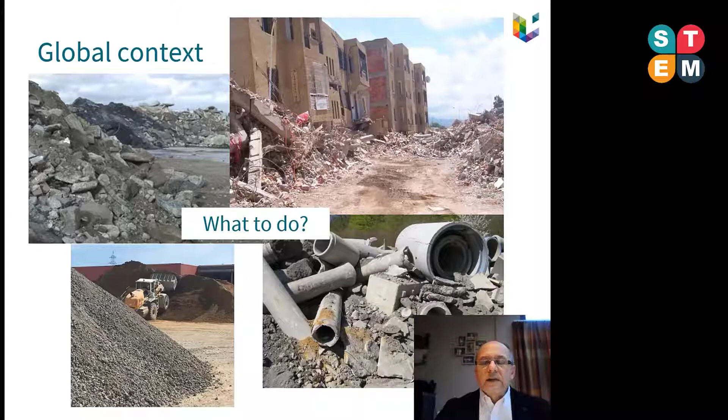First of all, we have to consider that we are living in a very, very limited world. If we consider the last COP in Glasgow, we can be sure that this limitation has to be considered in terms of energy, in terms of materials available specifically for the building and construction industry, but we are limited also in terms of space.

Where can we build? In some countries, in some cities, it's very difficult to find a place to build. We also have to consider the limitation of the environment's and nature's capacity to be resilient, meaning to be able to absorb the waste products we are producing. From this consideration, we have to change our behavior. That's one of the most important messages from the COP in Glasgow.

Regarding the construction industry, we have to consider the deposit and the market. Is there a good connection, a good correlation between the deposit and the market? That's what I would like to show you.

Firstly, we need to consider the capacity of construction and demolition waste to be recycled, once again in the construction industry. If we consider the scheme presented on the slide, we have to go from a linear economy to a circular economy, a well-known concept specifically applied to the construction industry, which has to be considered an objective for this industry.

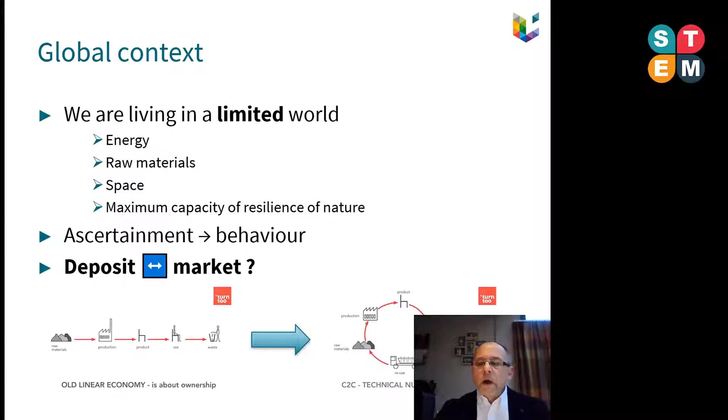Waste has to become a secondary raw material. If we consider the quantity of waste produced all over the world, about 4 billion tons a year are produced. That means from 80 to 126 tons per second produced worldwide.

The quantity of waste generated by human activities is enormous - 10 billion kilos of waste daily produced. In the construction industry, this corresponds to about 200 million tons in 2015.

The construction industry is responsible for more or less 40% of the CO2 and more or less 40% of the total quantity of waste produced, if we add recycled aggregates and the quantity of earth produced as waste.

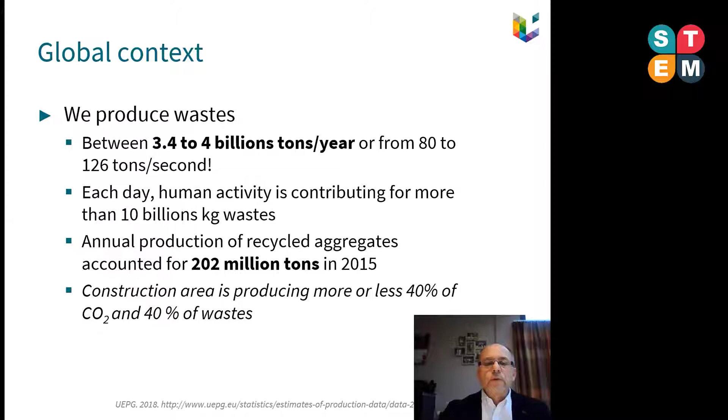This is enormous. On the other side, we need a lot of materials. As an example, the production of cement is about 4 billion tons a year, 56% coming from and consumed in China. For the concrete industry, it corresponds to about 10 billion tons a year that we need to build bridges, roads, houses, buildings, dams, etc.

In terms of production and consumption of cement per inhabitant in 2018, it corresponded to more than 1,700 kilograms in China. In the European Union, it corresponds to an average value of 300 kilograms. In the USA, it's a little less than this, and in Belgium, for example, it's 550 kilograms per inhabitant.

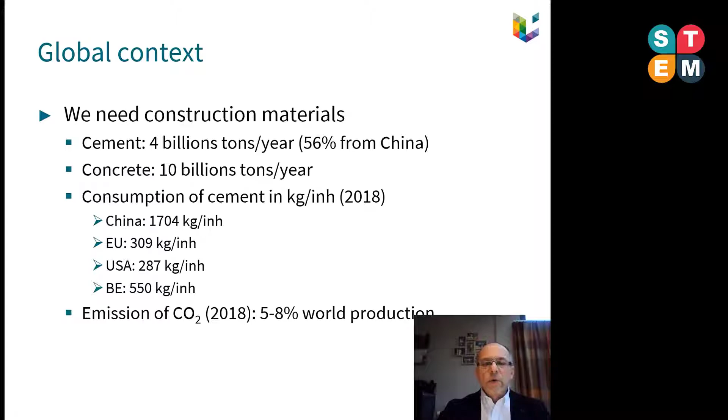This typical material, cement, corresponds to a production of CO2 representing between 5 and 8% of world production. So we have to do something to reduce this production of waste. But we need construction material, we need aggregates.

This is the production of aggregates in billions of tons in the European Union and associated countries in Europe. We annually produce about 3 billion tons of aggregates, which is also a material becoming more and more limited in terms of access to exploitation.

This production at the level of the European Union is coming from a lot of small quarries and pits operated by more than 15,000 companies and local companies, because this is a very particular way of production as it is localized, and transportation has a big impact on the cost of the material. So we are also limited in terms of transportation.

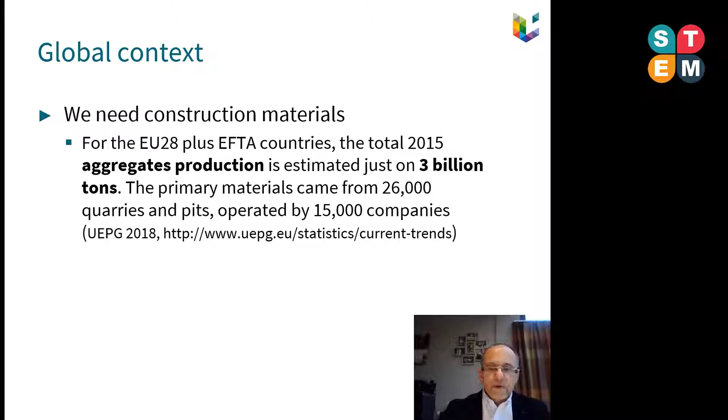This is a view of the production and consumption of aggregates in different European countries. Most of the production comes from crushed rocks and sand and gravel, and only a very small quantity of materials comes from recycled mobile or recycled fixed plant areas.

That means there is a big challenge to develop and increase the share of recycled material used in the construction industry.

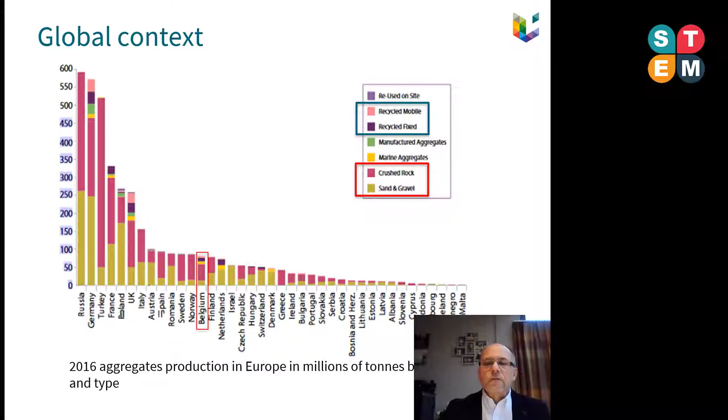This objective is oriented according to the 3R theory, which proposes a reduction, a reuse, and a recycling of materials. Recycling is the third step. Of course, it's better to reduce and reuse before recycling. But now we are at the level of recycling.

What is it possible to do with this construction and demolition waste, which is already used mainly in sub-base and base material in road construction, but which is a less noble application of this material? The objective is to introduce and increase the use of this material in a more noble industry, meaning concrete for prefabricated systems or structural elements.

The objective of the European Union in 2020 is that 70% of the construction and demolition waste should be valorized. Valorized means reused or recycled in the construction industry, or in other industries if possible. That means our main objective is to reduce the use of classical and natural raw materials.

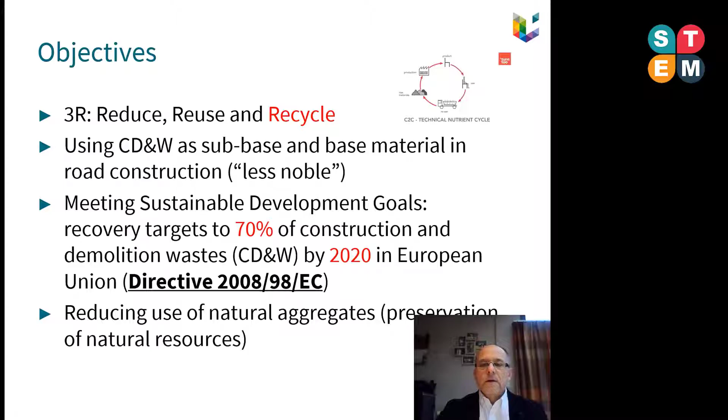For that, it's important to be able to characterize and to point out the difference between natural raw material and recycled raw materials.

The process for obtaining recycled construction demolition waste is a seven-step process where we have the reception, the storage of the material, the first processing for separating most of the material, then a mechanical grinder that leads to the first main step, which is the crushing, usually by means of an impact or a jaw crusher.

After that, there is a classification of the material, specifically to obtain and extract ferrous and possibly non-ferrous material from the mineral one, which is constituted mainly of concrete, bricks, ceramics, etc.

A seventh important step is the separation, which is a manual separation of material to avoid rubber, wood, and plastic material, which could be considered contaminating material for the development and production of aggregates.

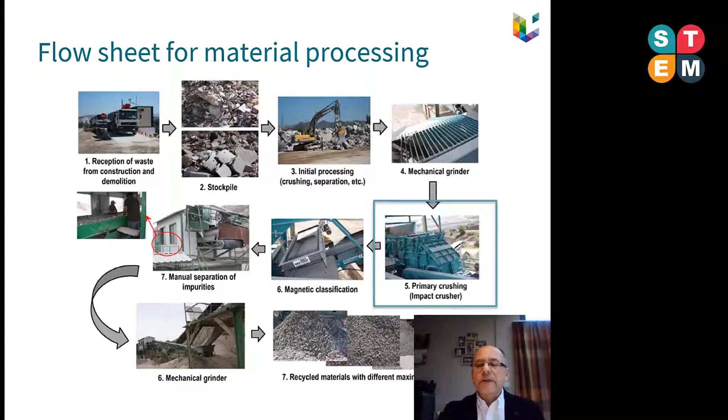This crushing may be obtained by mainly two types of crusher, like a jaw crusher, which allows us to produce very fine fractions but can induce a significant wear process, meaning we will have to continuously replace the jaws in the system.

The second type of crusher is the impact crusher, which can be used to treat bulky waste like concrete slabs, but it doesn't allow production of very fine particles and generally requires a secondary crushing.

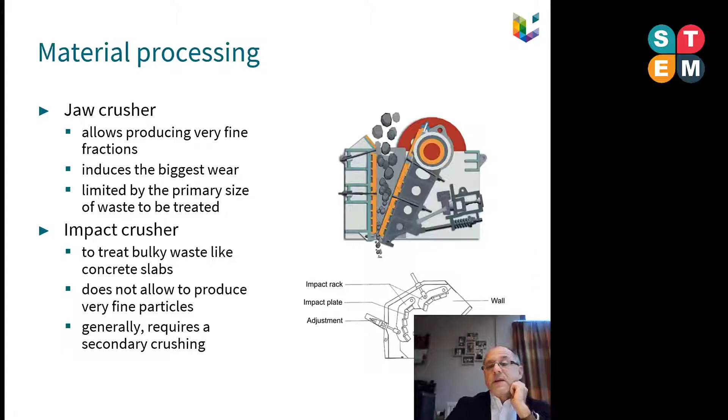How important is it to select the proper crusher? This is important from the point of view of the characteristics of the material, and specifically the flakiness.

Here you can see that we produced experimental mixes, changing one reference mix of reference concrete. We changed the type of cement, from CEM1 to CEM3, sandstone versus limestone, and we also changed the cement content and the water-to-cement ratio. We wanted to investigate the effect of crushing on the characteristics of the material.

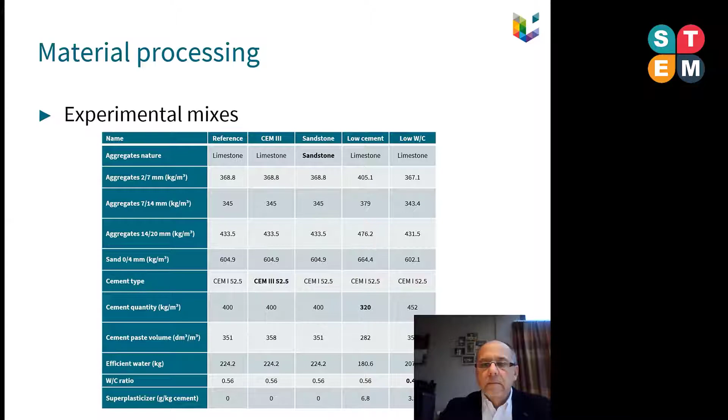We can see here the flakiness index with regard to the granular fraction, and we observe that flakiness decreases with increasing granular fraction. This means the jaw crusher is also producing flakier aggregates, even though there is no influence of the concrete composition. So the granular fraction has a big impact on the characteristics of the material obtained, specifically with fine particles.

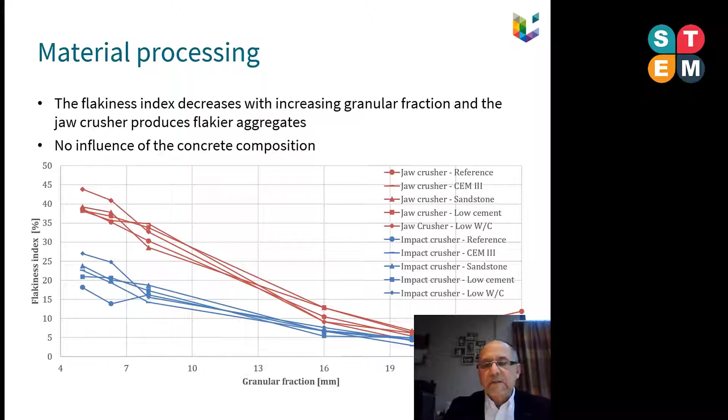We also observe that the water absorption, corresponding to the quantity of residual cement paste adhering to the former aggregates, is higher for a lower granular fraction. This means that sand particles contain a larger quantity of residual cementitious material, which is detrimental to the characteristics of the material to be recycled.

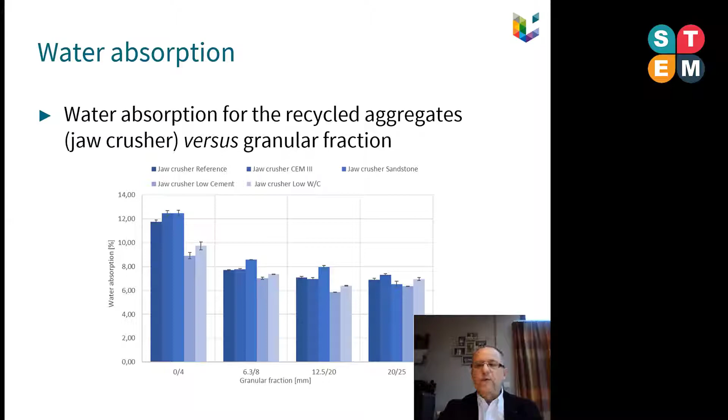That's why we set up different PhD theses to study the characteristics of these fine materials. You can find the references on the slide. These theses were oriented toward the recycling of crushed concrete aggregates, the influence of residual gypsum adhering to fine aggregate particles, and also the reuse of bricks. I would like to focus only on the second and third topics today.

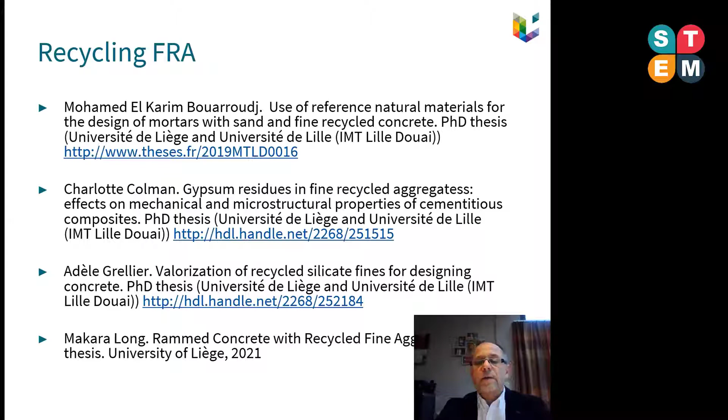So first of all, what is the effect of gypsum residues on fine recycled aggregates? Recycled aggregates, specifically the finer fraction—that is, the 0 to 4 millimeter sandy particles—are very often not valorized because they correspond to a high quantity of residual gypsum.

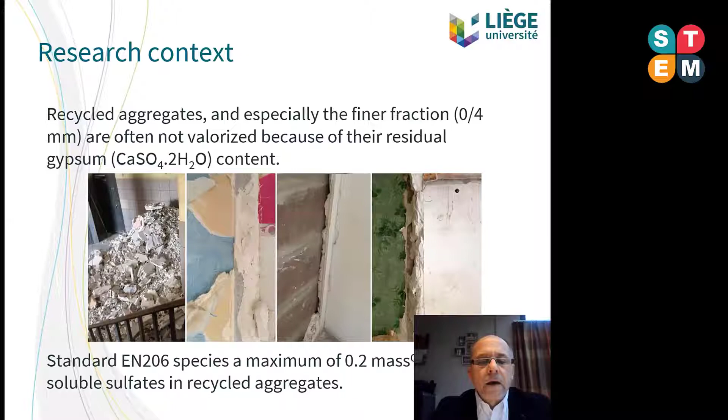Gypsum comes from the plaster used in buildings, and is characterized by the chemical content CaSO4·2H2O, which can be detrimental to the reuse and valorization of this type of material. The EN standard devoted to concrete specifies a maximum of 0.2% by mass of sulfate in recycled aggregates.

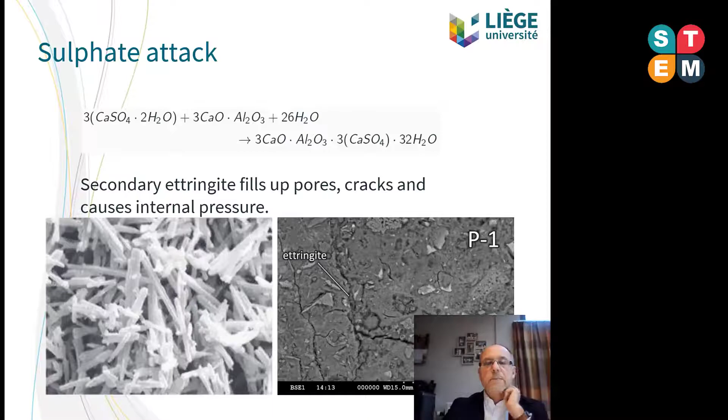Why is it so important? It's because the chemical reaction of this gypsum with the calcium aluminate you can find in the cement, in presence of water, can produce big crystals in the forms of ettringite. This secondary ettringite, produced by this chemical reaction, produces expansion cracks, and by internal pressure can induce very big deterioration of the concrete. That's why there is a big and strong limitation of the use of this material.

The consequences at the structural level are this type of degradation with a lot of cracks, a crocodile skin pattern of cracks, induced by this internal pressure, specifically in structures which are in contact with water.

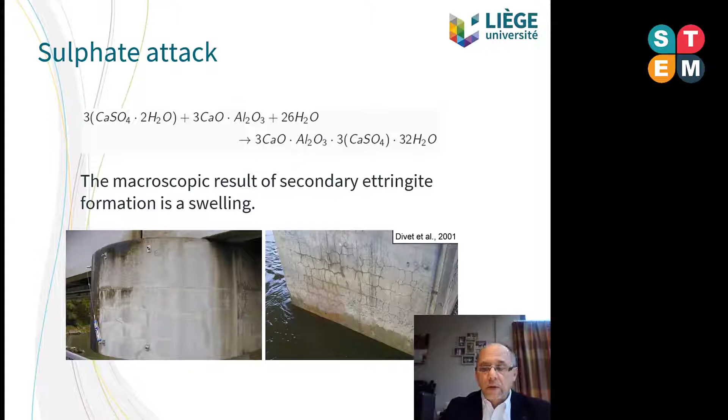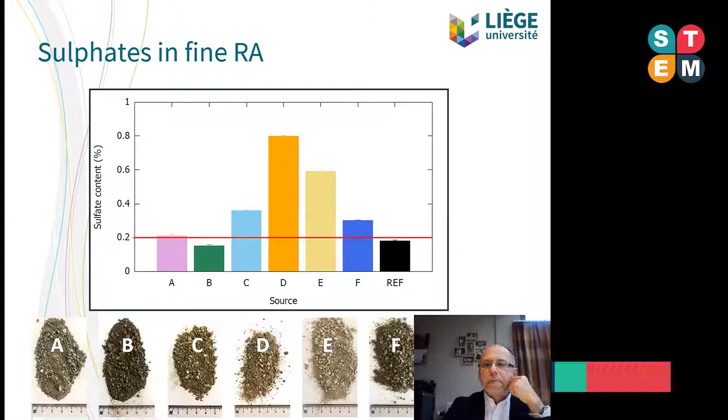We made an investigation on different recycling plants, and we took some samples to analyze the quantity of sulfate contents. Remember that the limit is 0.2% of recycled aggregates. In some situations we were above this value, in others under this limitation, depending on the type of recycling plant and the type of material coming to these plants. Of course, concrete coming from roads construction doesn't contain a lot of sulfates, while concrete coming from houses is contaminated with larger quantities of this material.

We tried to study, by recomposing materials in the lab, to clearly define the effect of the presence of sulfate with the fine recycled aggregates used to produce mortar. We measured the length change over time for these different types of material. The observation was that you needed a high level content, here the reference with more than 3%, to obtain and observe a real length change, corresponding to internal pressure and cracking of the material.

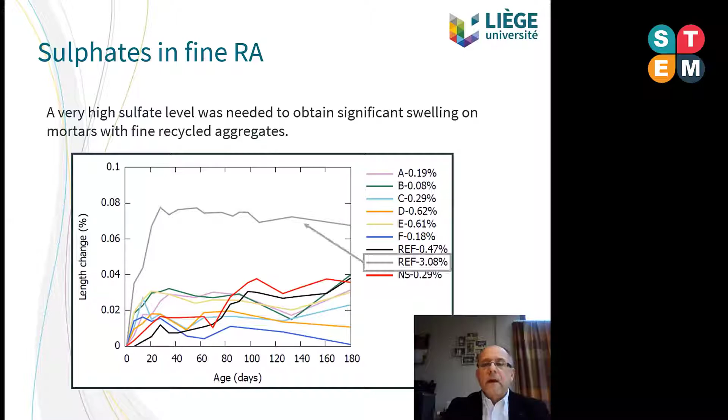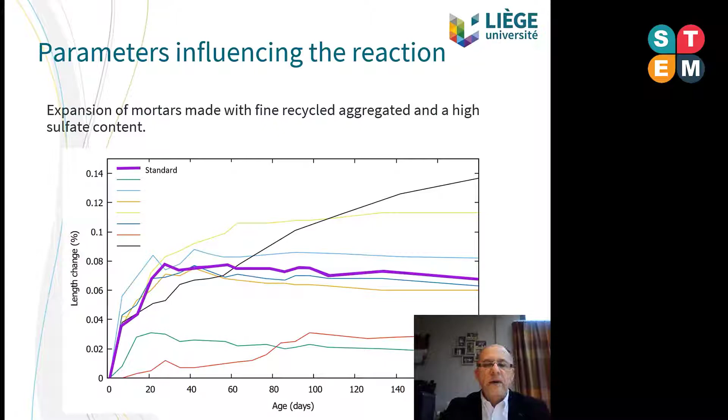We also tried to define the influence of different parameters. Here is the evolution of the standard material, defined with a specific quantity of sulfate. Then we have the same material but with a lower porosity, induced by a lower water-to-cement content, and a low temperature—storage at a temperature under 5 degrees Celsius. These are the two main factors that may increase the expansion.

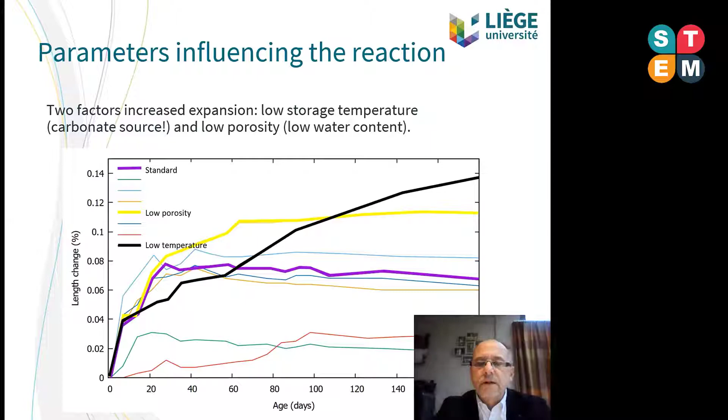The low storage temperature favors the production of thaumasite, which is another type of ettringite, and the low porosity doesn't permit the ettringite to occupy a volume of voids inside the material. That means that with lower porosity there is a bigger internal pressure.

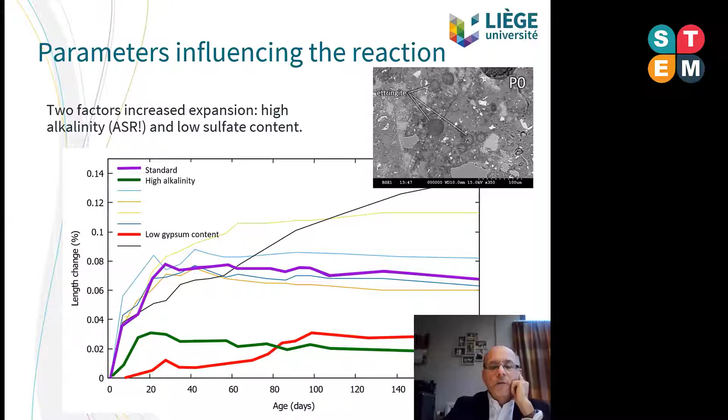If we consider the effect of the content of gypsum or the high alkalinity of the media, we can observe a lower value of expansion, which is positive. At the same level, if we use a high sulfate resisting cement, or larger gypsum particles in order to defer the consumption of gypsum, or a higher porosity, there is a positive effect on the behavior of the material with a lower internal pressure.

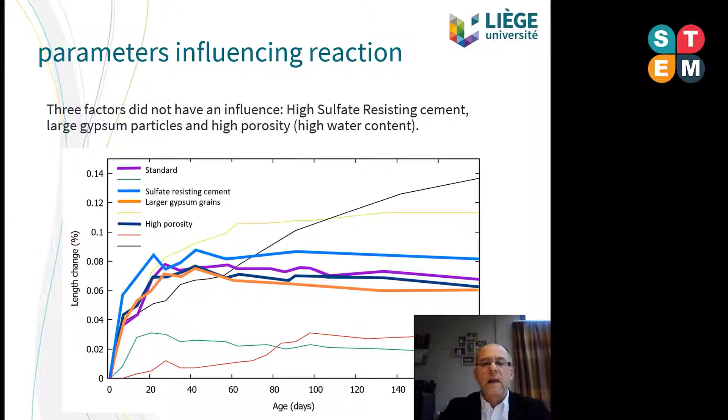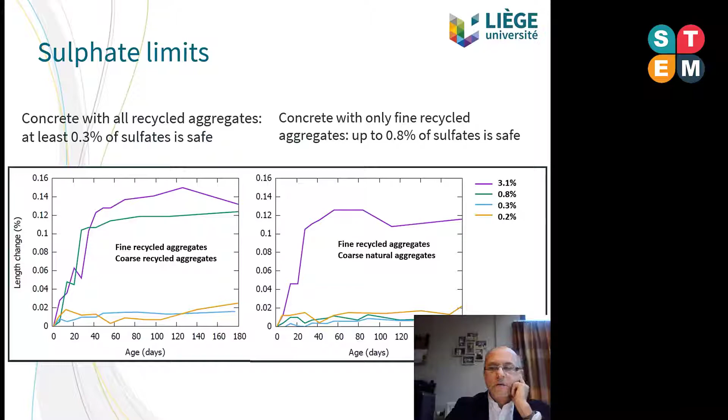So finally, we can conclude that the limit, which was at 0.2%, is too restrictive, and we could go at least to a sulfate content of recycled materials up to 0.3%. For a concrete where only fine recycled material and natural aggregates are used, we could go up to 0.8% of sulfates without any problem. These are the main conclusions of this investigation.

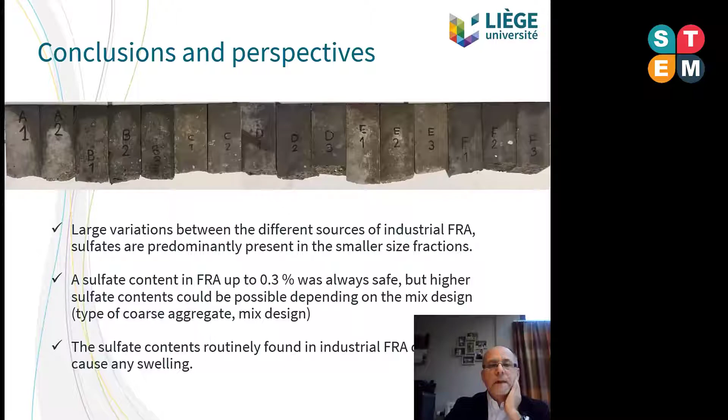The second type of material I would like to present for reuse is brick fines valorization. Brick waste flow corresponds to about 1 to 2% of construction and demolition wastes. Bricks are actually recycled in terms of reuse for the construction industry, the production of aggregates, or specifically brick fines, for example for tennis areas. But the brick fines remain a problem to recycle. The crushing of this brick is performed to increase the specific surface and to activate, by means of this fine crushing, the amorphous component of the material.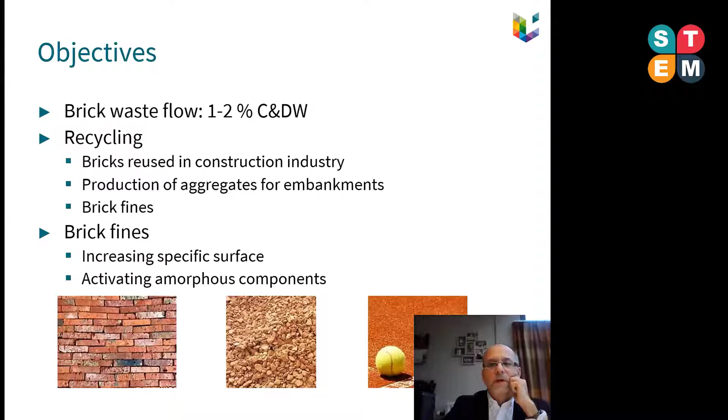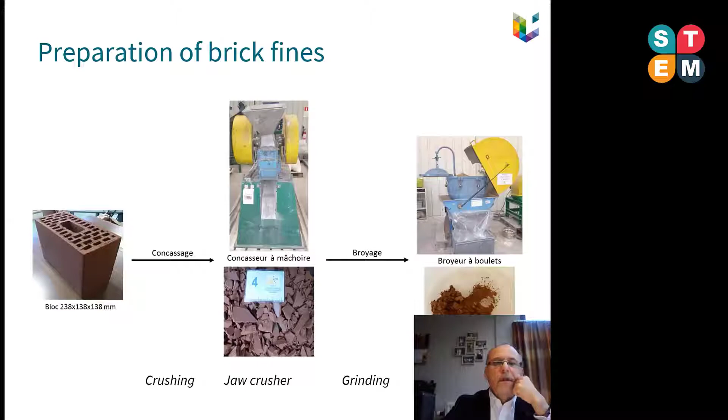That's what we try to do by a classical process in the lab: crushing by means of a jaw crusher, then grinding by means of a ball crusher. We obtain three types of granulometries, B1, B2, and B3, corresponding to very fine, classical, and coarser particles. The classical one, B2, corresponds to the dimension of classical cementitious particles, and we performed tests to study different percentages of substitution from 10 to 80%.

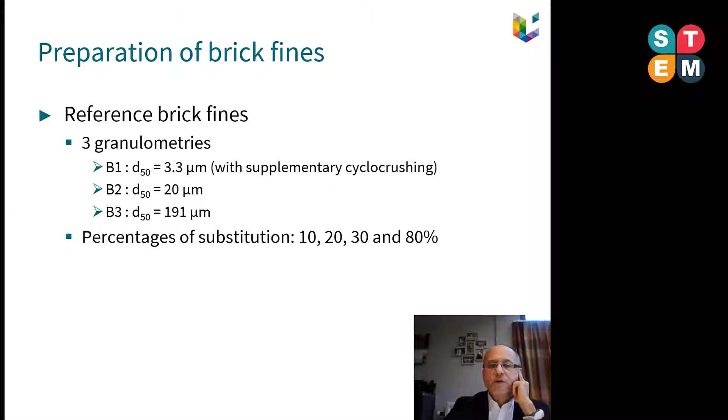The results clearly show that increasing the fine content and decreasing the cement content will decrease the strength of the material. However, even with 30% substitution, compressive strength remains interesting. That means we can find regular applications, specifically for B2, corresponding to a classical dimension for fine particles. We still obtain more than 60 megapascals as compressive strength after 90 to 180 days, which is interesting and corresponds to classical applications in the concrete industry.

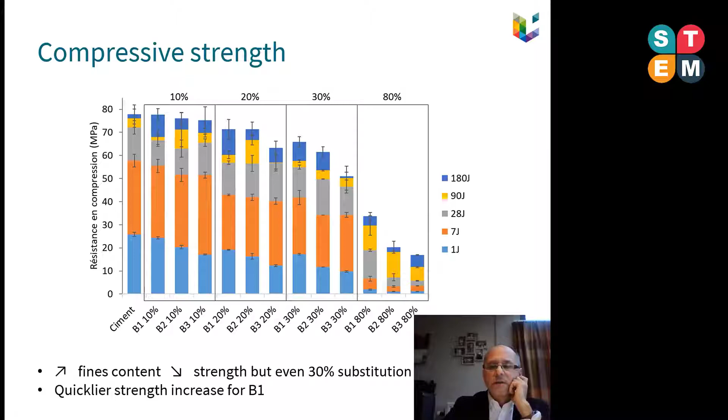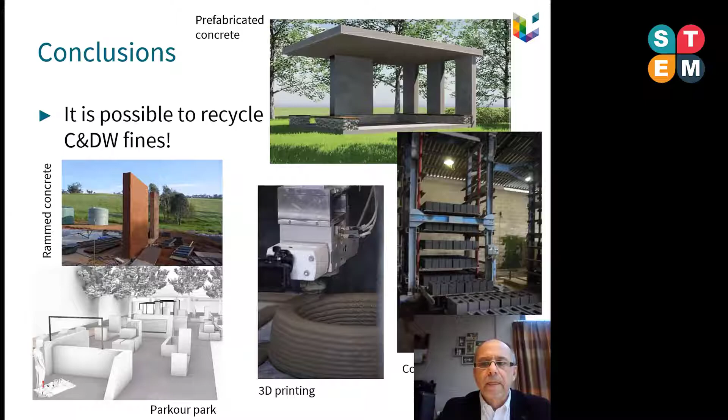The message is clearly that it's possible and quite easy to recycle construction and demolition waste fines in several applications, and we did it for concrete blocks, 3D printing, rammed concrete, and prefabricated elements. What is important is to be able to properly characterize these fine particles before using them. I thank you a lot for your attention.